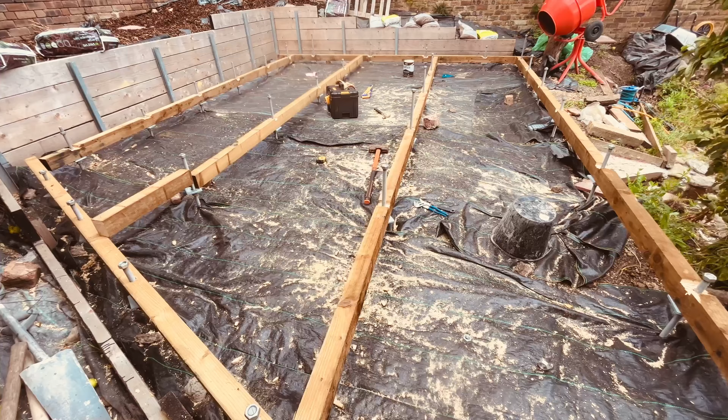Hello everyone. As a self-builder with timber frame, you can build an entire house with very few tools and in super quick time. But what's the best saw for a self-builder? Here I'll show you what to use and the best way to use it.

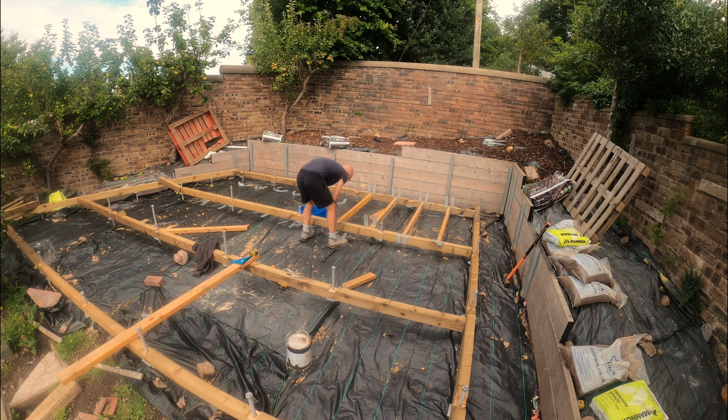Now, because of all the cutting that's involved in stick construction, as timber frame construction is often called, choosing the correct saw and cutting technique is key to speed and success.

Now, I used to love using a chop saw or miter saw, and you can pick up a miter saw these days for very little. This Evolution saw took care of this decking, this flooring, this house extension. Crazy value compared to the cost of a miter saw just 15 years ago.

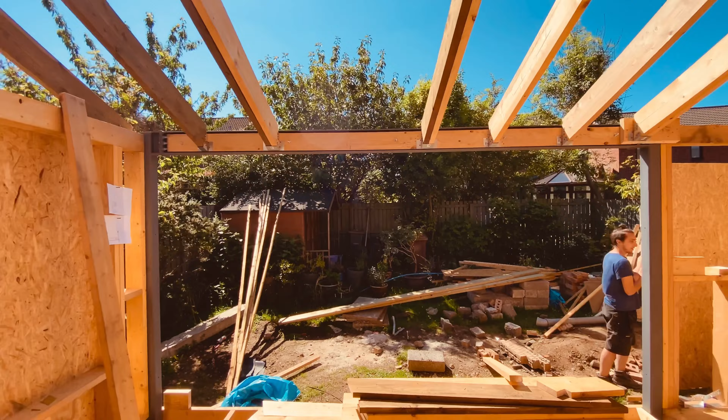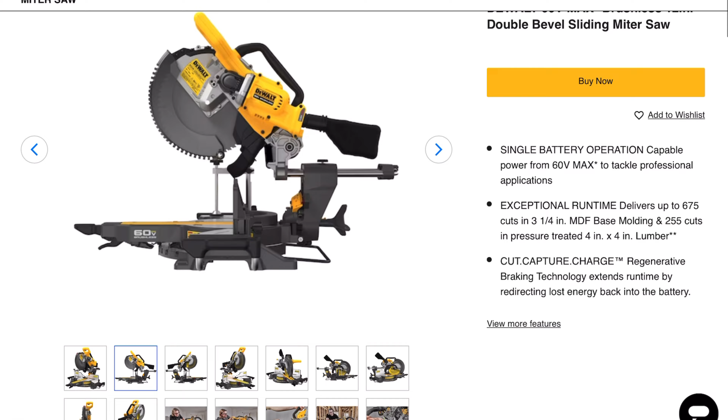Now, the big pain was always the need for a cord and a plug socket, and if you're working in some situations you need to work at 110 volts for health and safety requirements and a step down transformer. More kit, more hassle. So I was very excited when companies such as Dewalt and Makita started marketing their cordless miter saws. And if you're using them on a regular basis, the juicy price tag really isn't such a big deal versus the value that they add, especially if you're already bought into their ecosystem, with their excellent batteries and the chargers to go with them.

Now, I tend to use Dewalt as my go-to brand. I had Makita tools that were coming to the end of their life, and they were excellent. They were actually the first manufacturer who incorporated lithium batteries. But I was given a Dewalt driver to try a few years back. I loved the ergonomics as well as the torque. The size suited my physique, and that's what I've stuck with since.

Milwaukee, Hitachi, Ryobi, they're all excellent as well, all having their own particular advantages, which I'll probably talk about in more detail somewhere else. But for example, the best nail gun is Milwaukee, but their tools are quite heavy. The best brushless driver hammer drill combo, in my experience, is Hitachi, and if you're an occasional user, you could consider the cheaper and perhaps a slightly less powerful range of kit from Ryobi. Just bear in mind that single time in the middle of a project when you need the greater torque or the deeper cut, you might be a wee bit frustrated.

Now back to the chop saw, and these days I'm doing a lot of the work alone, especially in timber frame, because you can work so quickly in timber frame alone, and workflow is becoming more and more important. If you're working in a team where you can split the tasks and have, say, one person cutting and one person fixing. Setting up a chop saw with its own cutting bench, it could be a big time saver.

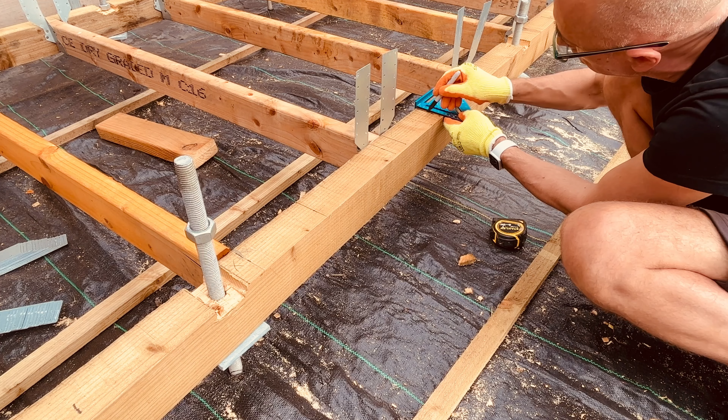If you're on your own, however, it's a different story, and I've found that minimising the amount of tools you use is the fastest workflow. I cut all my framing with just these 5 tools.

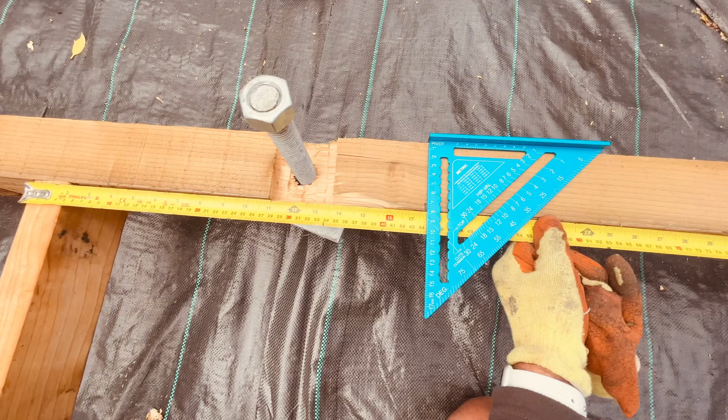I use this fantastic knife, a sharpened carpenter's pencil to go with it, this cordless circular saw by Dewalt using this blade, which is perfect for cutting stud work, an 8-meter sprung measure, and this beautiful speed square by Ox. With the circular saw, it's all about portability, run and gun solo working with speed. And since I'm working on my own so much, I just prefer to use a circular saw.

Now let's get some more jargon for you. We sometimes call a circular saw a Skilsaw, buzz saw, I've heard it called, or if you're from my part of the world, a rip snorter. But for this, let's stick with circular saw.

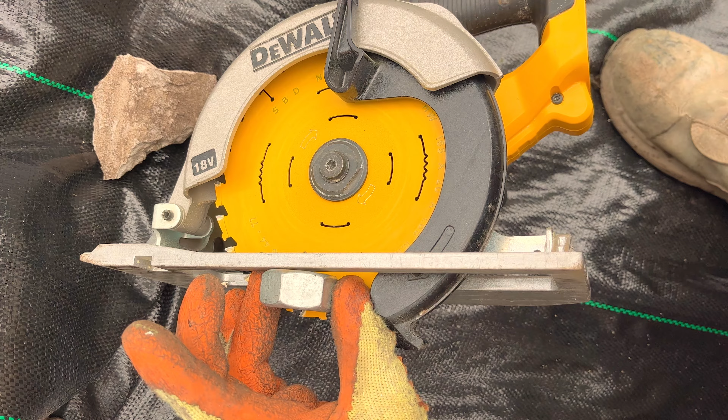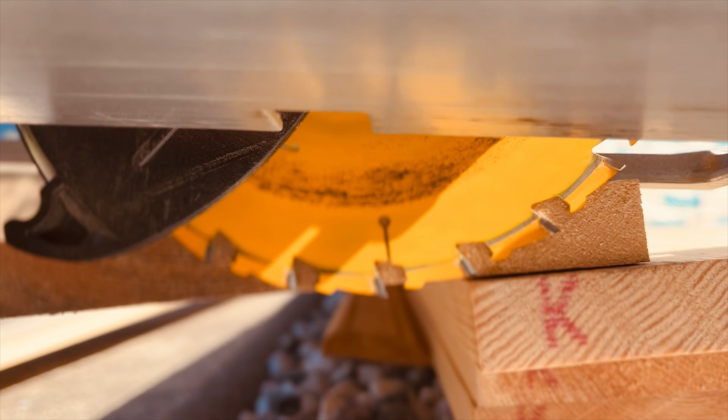And if you do go the route of cutting with a circular saw, there's a couple of super important things to consider. First is the blade. Set the blade to marginally below the depth of the timber you're cutting, a millimetre or 2 tops. It reduces the risk of binding and kickback since the blade uses the most efficient ratio of surface area.

It also prolongs the life of the blade. It's the most efficient way of cutting, so it drains less power from the battery, and it also won't take your fingers off if you place them in a silly spot. Sure, it's going to hurt and bleed, but you'll keep your fingers.

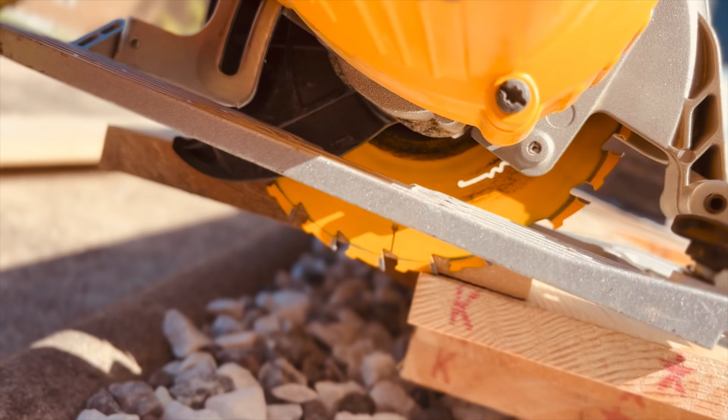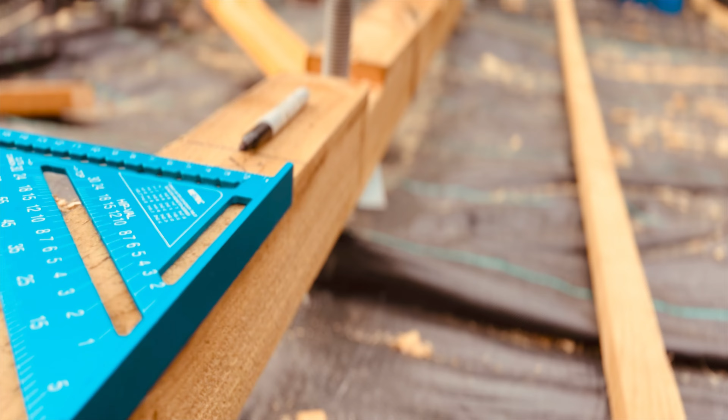Now, there's an essential tool to go with the circular saw. Since it doesn't have a guide or a fixed housing like the chop saw, we need our speed square every time for every cut. I've used plenty of set squares or speed squares over the years, but this one from Ox is my favourite. Great size and ergonomics, punch slots for taking your pencil for the accuracy you need, and metric sizing. Most of the squares are in imperial, and I don't really get why manufacturers can't produce for both markets.

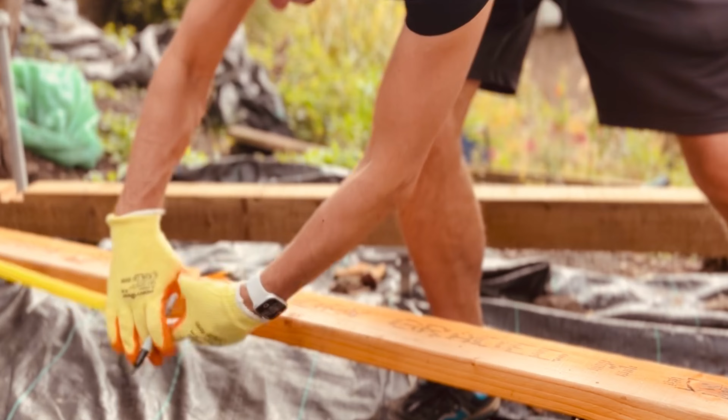It's true we mainly use the numeric parts of a speed square for doing angled cuts for things like rafters and bird's mouth joints, but occasionally I need to measure length using the square, and it's just a pain to have to reach for my tape where I'm always working in millimeters.

I use an 8 metre tape over a 5 metre one, since I use running dimensions for setting out my centres for rafters and joists. 5 metres is often not long enough. Running dimensions gives far more accuracy. See my other video here for how to set out your joists accurately and why it's important.

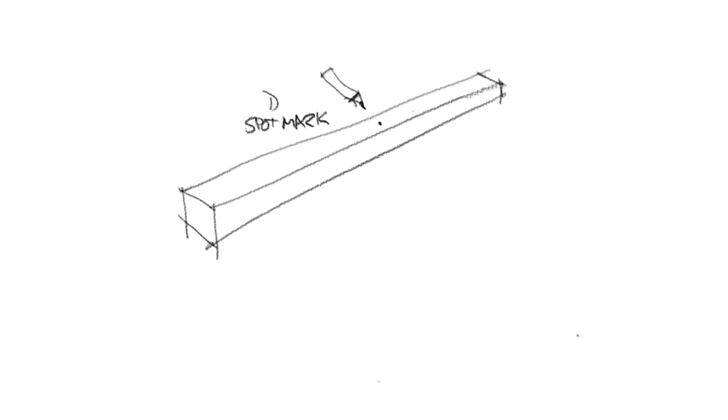Spot mark your cuts and then use your speed square to cut the line. And why bother with a cut line if you're using your speed square as a guide for the saw? Well, it's to help you avoid cutting along the line, since the blade has a few millimeters of thickness that will eat into your measurement and not give you the accuracy that you need. Line the outside of the blade to immediately beyond your pencil line for super accuracy.

And that's one great advantage with the chop saw. Nowadays they come with a laser line that helps you do this without having to worry about placing the blade. I'll leave some links below to all the tools that I've talked about here and used in the video.

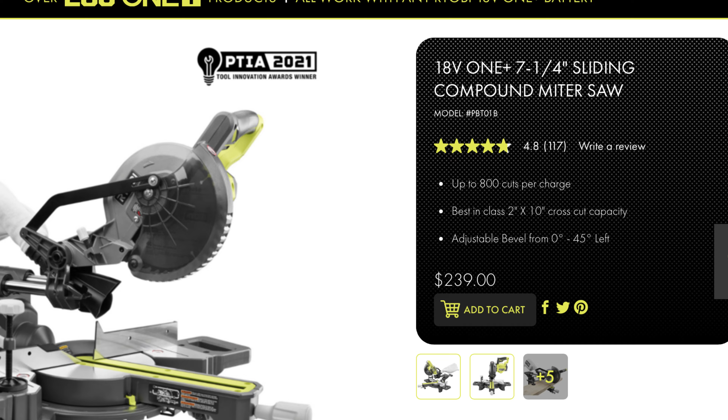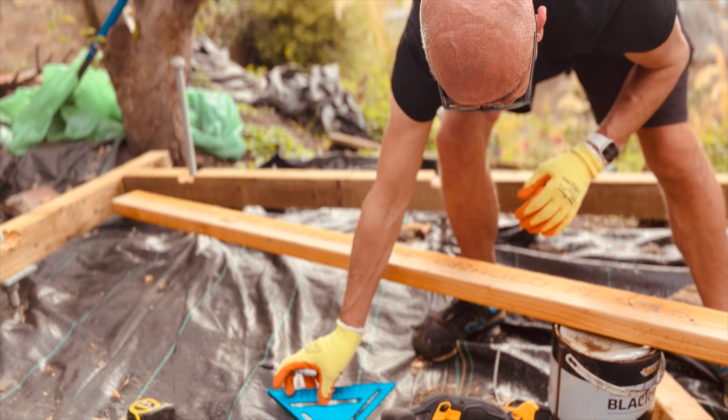With my centres marked, I'll measure each joist and add around 2 millimeters onto the length to help with securing the timber in place. Make a perpendicular line using the speed square at the mark, and then place the blade of the saw so it cuts immediately to the waste side of the timber.

Now, kickback. Kickback is a very dangerous thing with any power tools, but especially with a circular saw, and I see inexperienced users making this mistake the first time they pick one up. Now, I remember showing our apprentices how to do this, and I could see that they're thinking, yeah, just let me get on with that lovely cutting.

And it's very easy when your mind is on the end result, in this case the cut object that you're looking forward to get fixing and hammering with, to forget about the process, and that's when you're most prone to accidents. To avoid kickback when you set up your timber lengths for cutting, set up your studs so the short side of the offcut can just fall away.

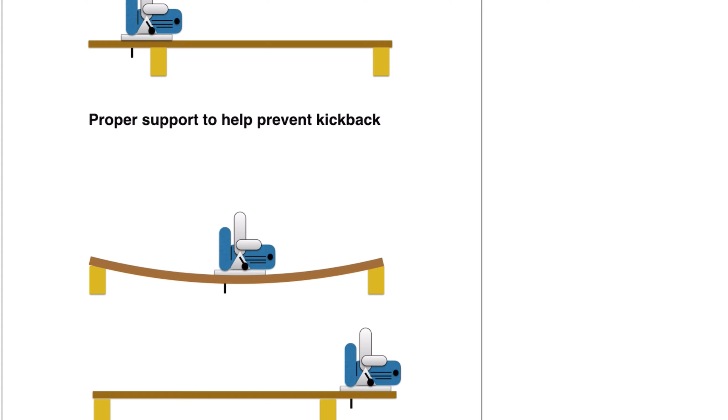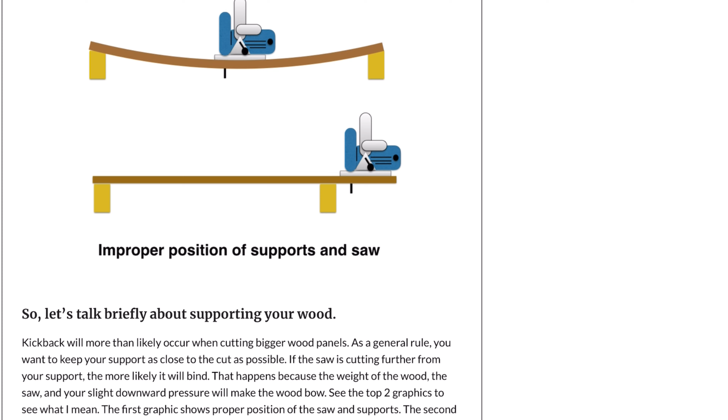Anything over, say, 1.5 meters, and I won't cut like this, and I'll use 2 sets of sawhorses or a chop saw instead. That's really important. Otherwise you'll find at best the saw will jam towards the end of the cut, and at worst you'll get some very dangerous kickback, which happens so quickly it could catch a part of your body whilst the blade is still spinning, since you haven't had time in that split second to release the trigger.

I've left some links to some videos below that expand on the safety issue, because I'm probably not explaining it fantastic here. But with that said, building with timber frame is such a pleasure, and cordless circular saws have just enhanced the experience.